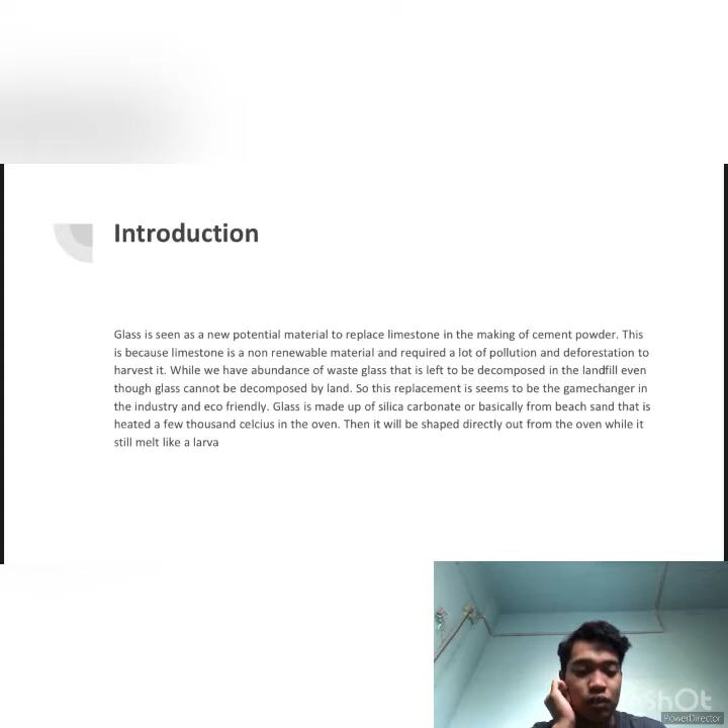Glass is seen as a new potential material to replace limestone in the making of cement powder. This is because limestone is a non-renewable material and requires a lot of pollution and deforestation to harvest it, while we have an abundance of waste glass left to decompose in the landfill, even though glass cannot be decomposed by land. So this replacement seems to be a game changer in the industry, and it is eco-friendly.

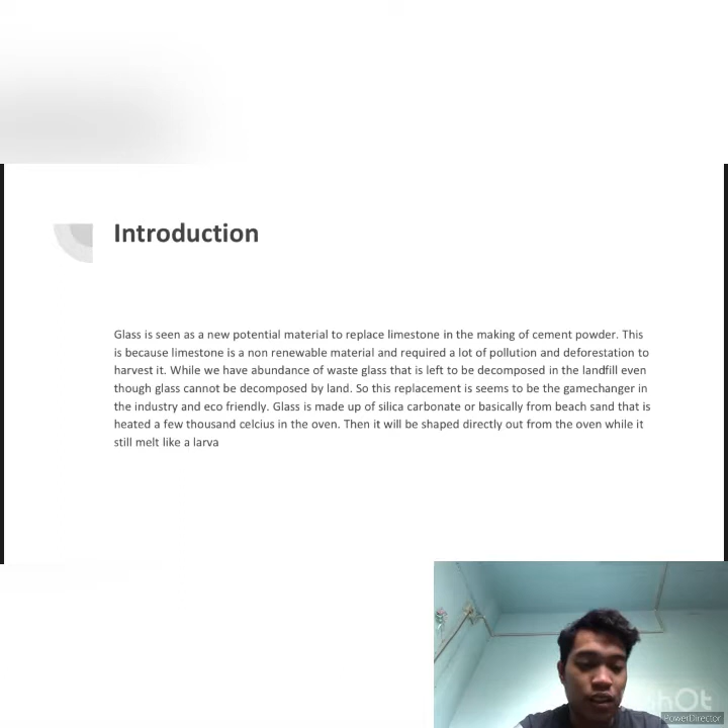Glass is made out of silica carbonate, basically from beach sand that is heated to a few thousand degrees Celsius in the oven. Then it will be shaped directly out from the oven while it's still melted, like lava.

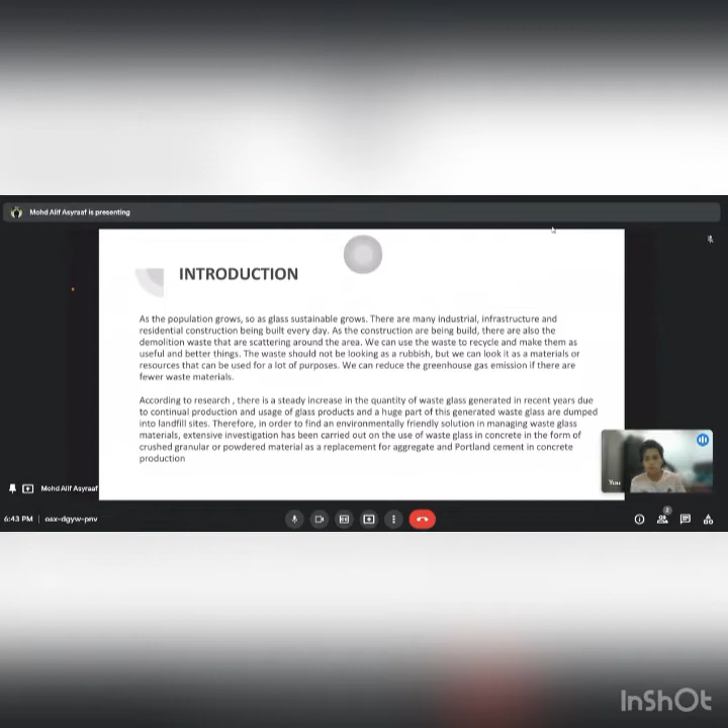extensive investigation has been carried out on waste glass in concrete form, as a crushed granular or powder material, as a replacement for the aggregate and Portland cement in concrete production.

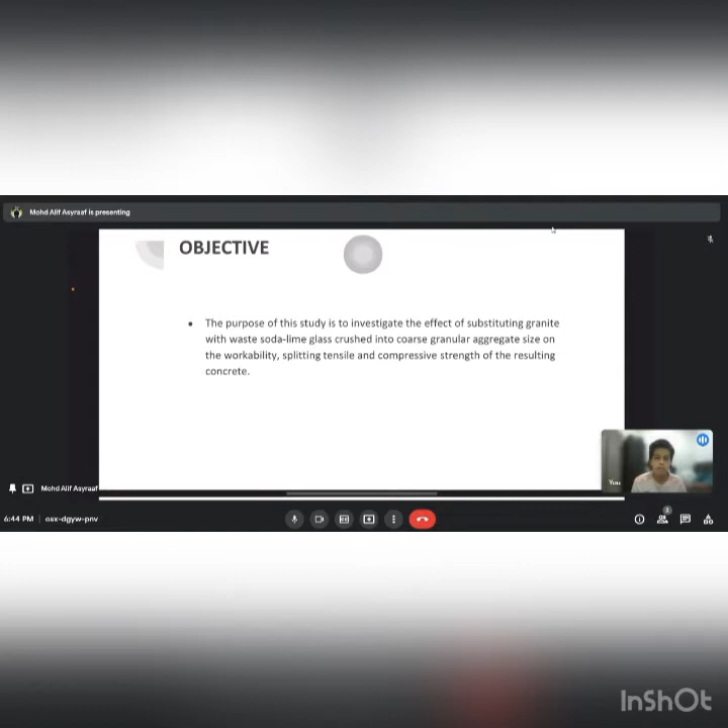So the objective of this journal is to investigate the effect of substituting granite with soda lime glass crushed into a coarse granular aggregate size, on the workability, splitting tensile, and compressive strength of the resulting concrete.

So for the experimental methodology, firstly we use the slump test. As we know, all mix is in proportion 1, 2, and 4, which is cement, sand and granite, also the glass aggregate, and constant water at 0.5.

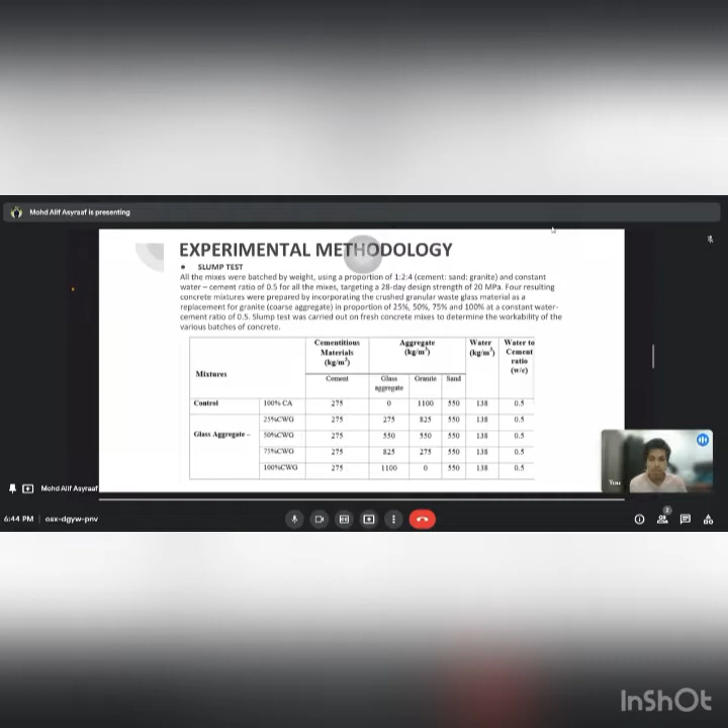And then, as shown in the table below, we can see the 5 tests of the experiment, which is the percentage of cement water and the glass, which is 25%, 50%, 75%, and 100%.

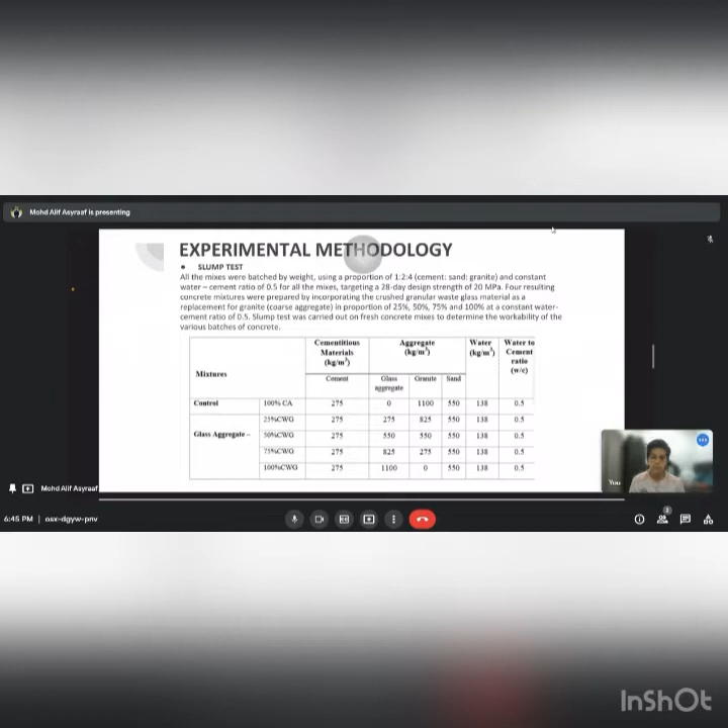So next is the compressive strength test, where the concrete cube was made and immersed in water at room temperature, and tested for compressive and split tensile strength at ages 3, 7, 14, 28, and 90 days, for each percentage of replacement of granite granular with waste glass aggregate material.

The compressive strength of the concrete cube and the split tensile strength of the concrete cylinder were determined in compliance with the provision, using the YES 2000 digital display compression machine.

Lastly, is scanning electron microscopy, SEM. The microstructural examination of the fractured part of the concrete was carried out using the scanning electron microscopy, SEM.

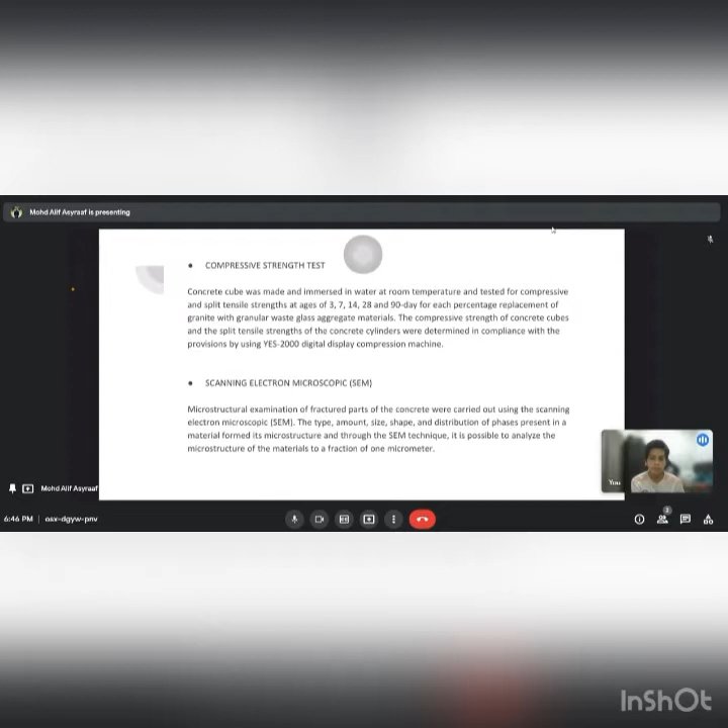It can determine the type, amount, size, shape, and distribution of phases present in the material form in the microstructure, and through the SEM technique, it is possible to analyze the microstructure of the material to a fraction of 1 micrometer.

This reduction in slump may be attributed to the angular geometry of the granular particle of the glass, which reduces the fluidity of the mix as the glass content increases, resulting in less availability of cement paste required for the concrete fluidity. Moreover, for concrete containing glass aggregate to achieve the same workability as conventional concrete, it will require higher water content.

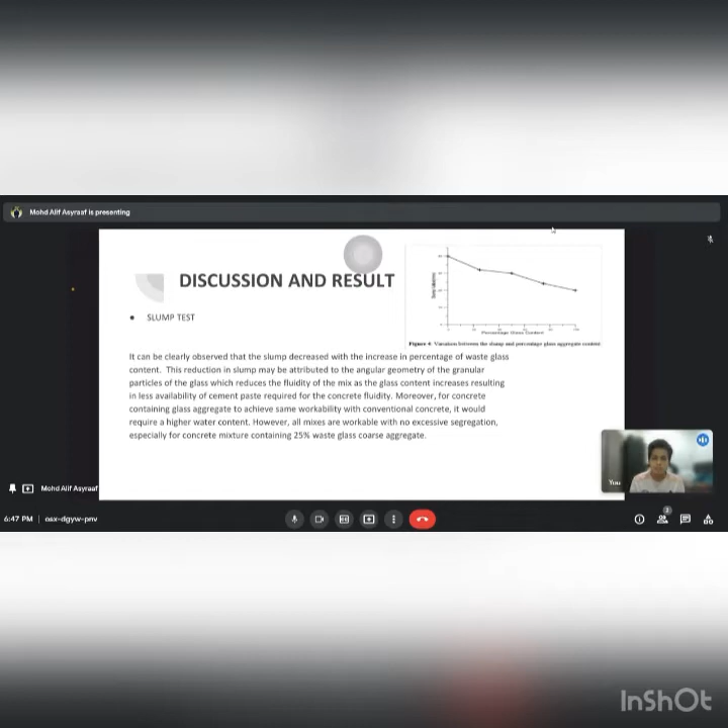However, all mixes are workable with no excessive segregation, especially for the concrete mixture containing 25% glass coarse aggregate. Next is the compressive strength.

From the graph above, it clearly indicates that as the percentage replacement of granite with glass aggregate increases beyond 25% replacement, the compressive strength of the concrete decreases at early curing ages of 3 and 7 days.

At both curing ages of 28 and 90 days, the decrease of the compressive strength of the concrete shows strong correlation. They observed lower compressive strength of the concrete mixture containing 75 and 100 percent granular aggregate, attributed to the weaker bond strength between the sharper edge and smooth surface of the glass particle and the cement paste matrix at the interfacial transition zone.

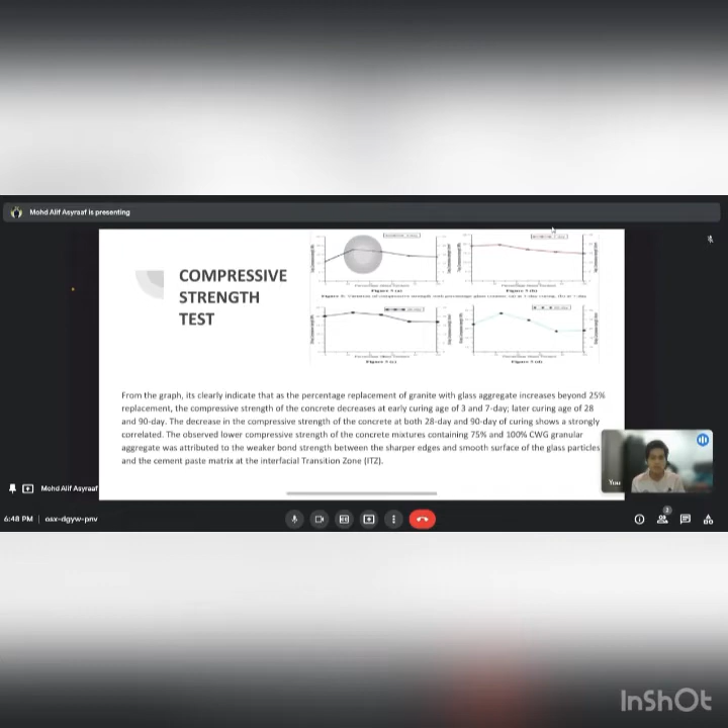Lastly, from scanning electron microscopy, SEM. The microstructural examination by SEM on selected concrete containing glass aggregate was conducted to further assess the bond between the cement paste at the interfacial zone.

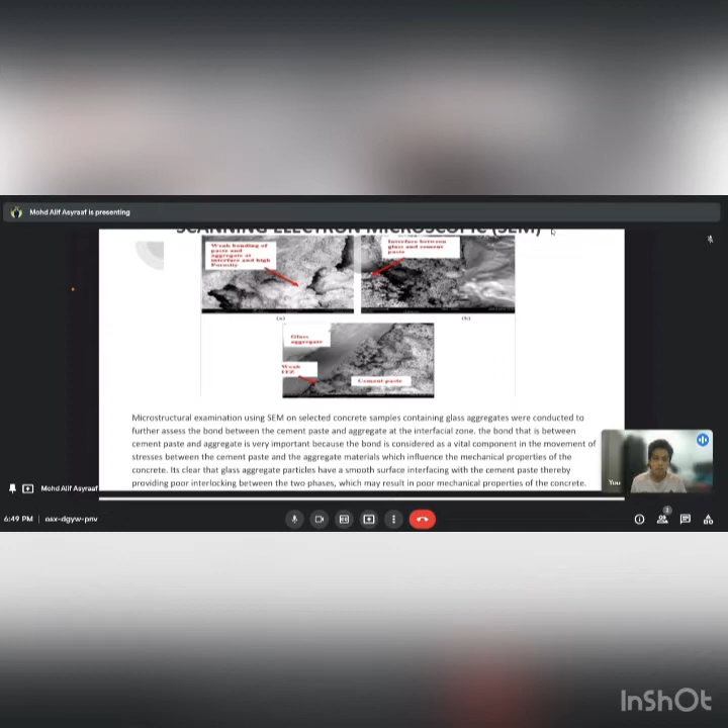Strength and microstructure of eco-concrete produced using waste glass, with partial and complete replacement for sand.

Introduction. The benefit of using waste glass as a substitute for natural aggregate in concrete offers a promising environmental solution to the growing problem of efficient management of glass waste in developing nations.

Glass is an indispensable material to man and one of the oldest man-made materials on Earth. Because of its properties, glass can be formed into many shapes and forms, which include flat glass, bulb glass, container or bottle glass, and cathode ray tube glass.

However, glass has a limited life usage in the form in which it is produced. Moreover, based on chemical composition, glass can be classified into different categories, with the most widely used and readily available glass type being soda-lime glass.

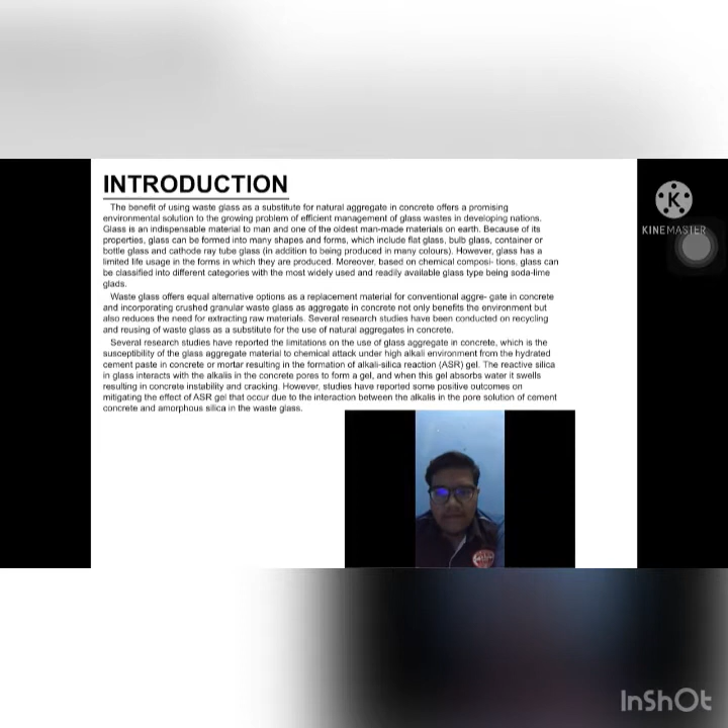Waste glass offers an equal alternative option as a replacement material for conventional aggregate in concrete, and incorporating crushed granular waste glass as aggregate in concrete not only benefits the environment but also reduces the need for extracting raw material.

Several research studies have been conducted on recycling and reusing waste glass as a substitute for natural aggregate in concrete. Several research studies have reported the limitation on the use of glass aggregate in concrete.

The limitation is the susceptibility of the glass aggregate material to chemical attack under a high alkali environment from the hydrated cement paste in concrete or mortar, resulting in the formation of alkali-silica reaction.

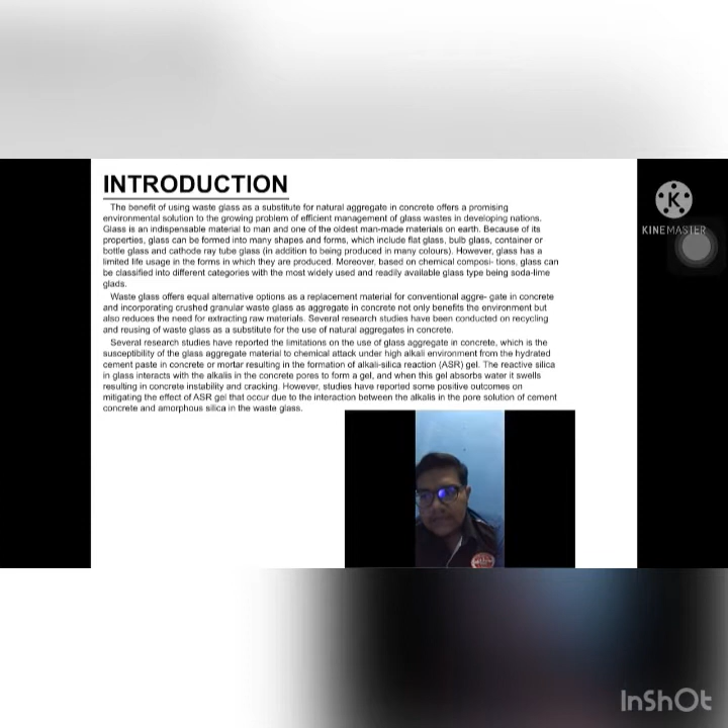The reactive silica in glass interacts with the alkalis in the concrete pore solution to form a gel, and when this gel absorbs water it results in concrete instability and cracking.

However, studies have reported some positive outcomes on mitigating the effect of ASR gel that occurs due to the interaction between the alkali in the pore solution of cement concrete.

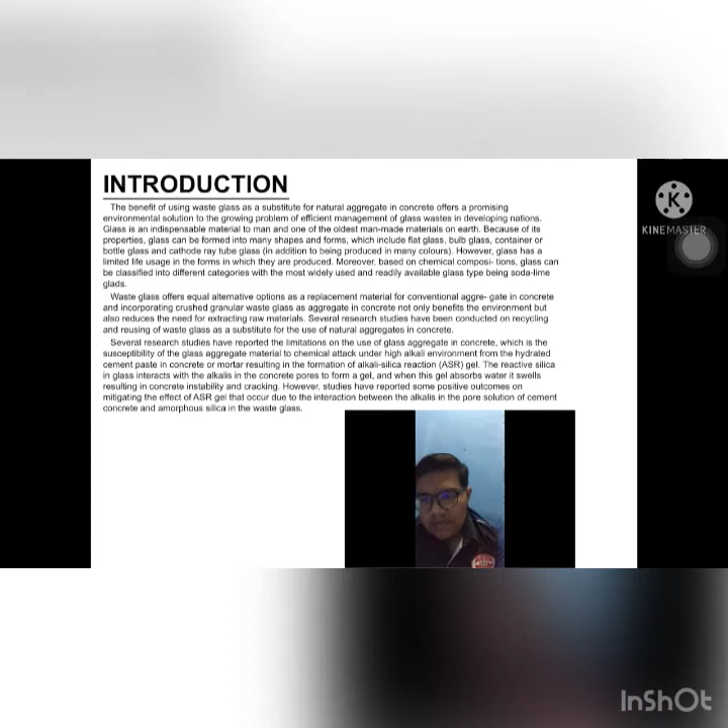Methodology. All concrete material used in this current study were locally sourced. Typical ordinary Portland cement, which complies with ASTM Type 1 cement suitable for general purpose construction, was used.

The chemical composition of the cement was determined according to ASTM C114 using X-ray fluorescence. The chemical composition and physical properties of the cement are shown in Table 1.

The waste glass was collected from different waste disposal sites and glass workshops within the environment of OTA, Nigeria. The collected glass contained majority flat glass and container glass. After collection, the glass was soaked in water.

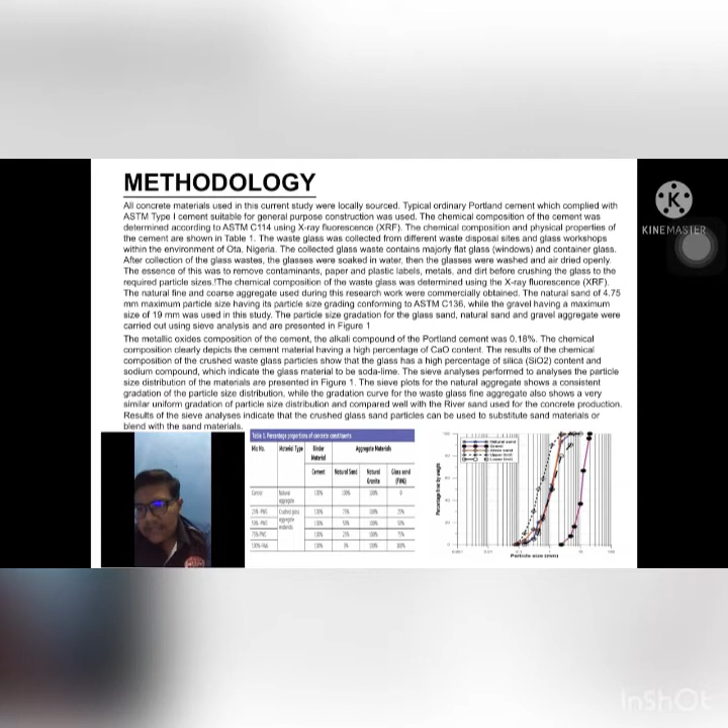Then the glass was washed and air dried openly. The essence of this was to remove contaminants—paper, plastic labels, metal, and dirt—before crushing the glass to the required particle size.

The chemical composition of the waste glass was determined using X-ray fluorescence. The natural fine and coarse aggregate used during this research work were commercially obtained.

The natural sand of 4.75 mm maximum particle size had its particle size grading conforming to ASTM C136, while the gravel having a maximum size of 19 mm was used in this study.

The particle size gradation for the glass sand, natural sand, and gravel aggregate were carried out using sieve analysis and are presented in Figure 1.

The metallic oxide composition of the cement showed the alkali compound of the Portland cement was 0.18%. The chemical composition clearly depicts the cement material having a high percentage of CaO content.

The result of the chemical composition of the crushed waste glass particles shows that the glass has a high percentage of silica content and sodium compounds, which indicates the glass material to be soda-lime glass.

The sieve analysis performed to analyze the particle size distribution of the material are present in figure 1. The sieve plots for the natural aggregate show a consistent gradation of the particle size distribution, while the gradation curve for the waste glass fine aggregate also show a very similar uniform gradation of particle size distribution, and compare well with the river sand used for the concrete production.

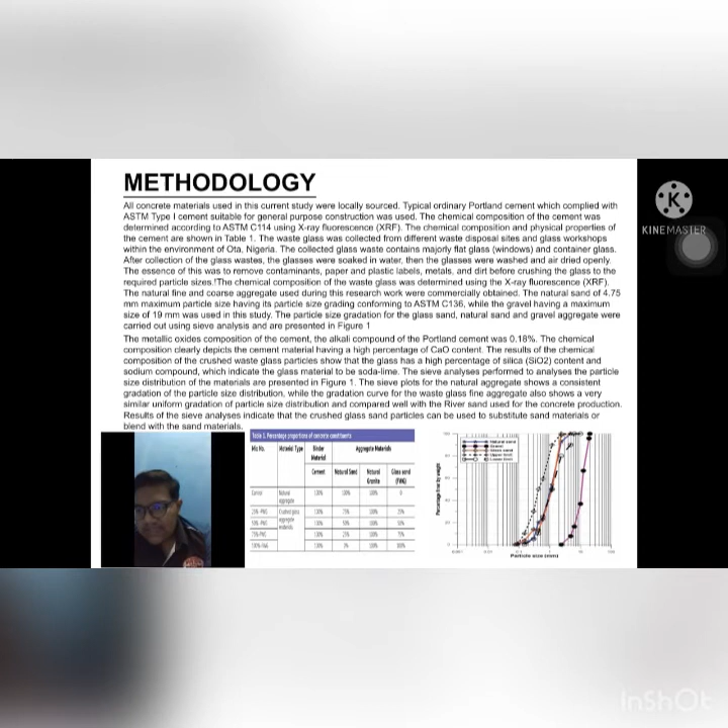Result of the sieve analysis indicate that the crushed glass sand particle can be used to substitute sand material or blend with the sand material.

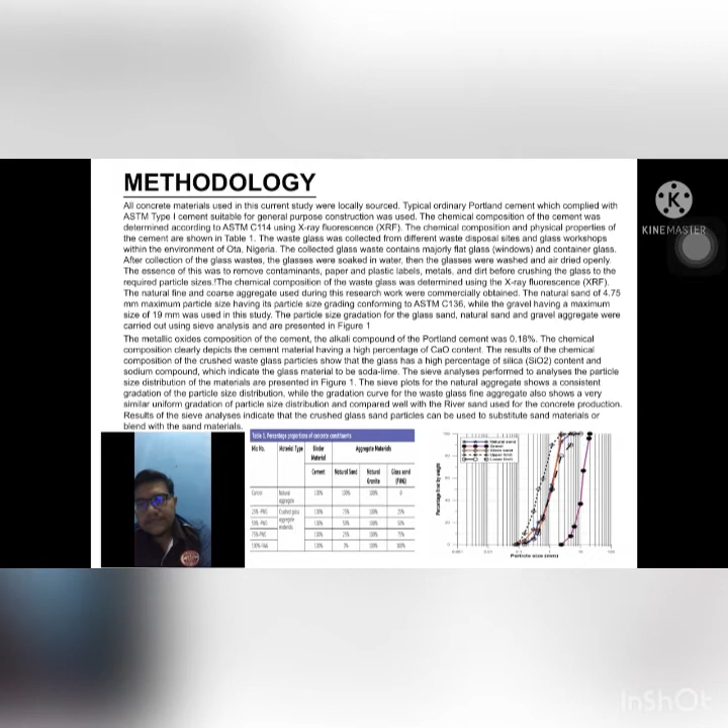Result and discussion. Properties of fresh concrete: workability. The test result for the slump recorded for the control and mix containing fine glass sand at different proportions are shown in picture 1.

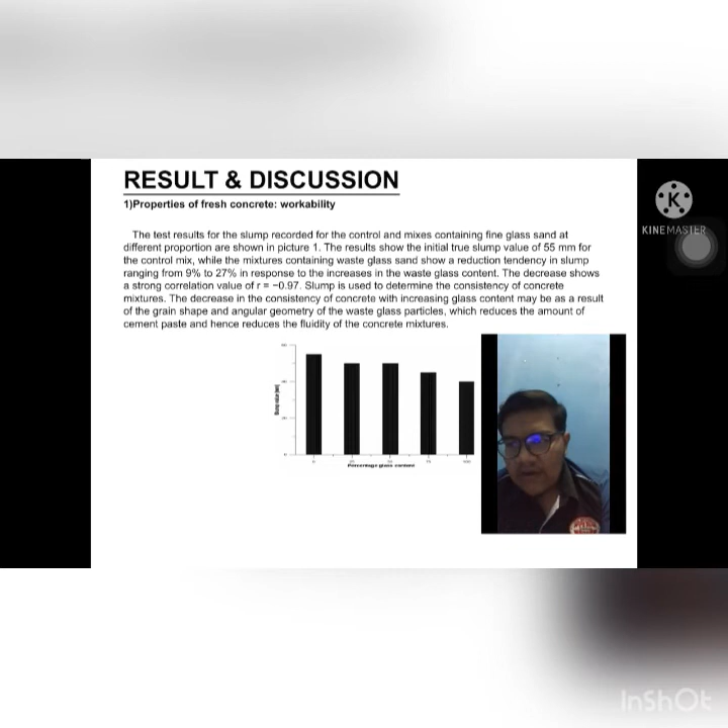The results show the initial true slump value of 55mm for the control mix, while the mixture containing glass sand show a reduction tendency in slump, ranging from 9% to 27% in response to the increase in waste glass content. The decrease show a strong correlation value of R equal to negative 0.97.

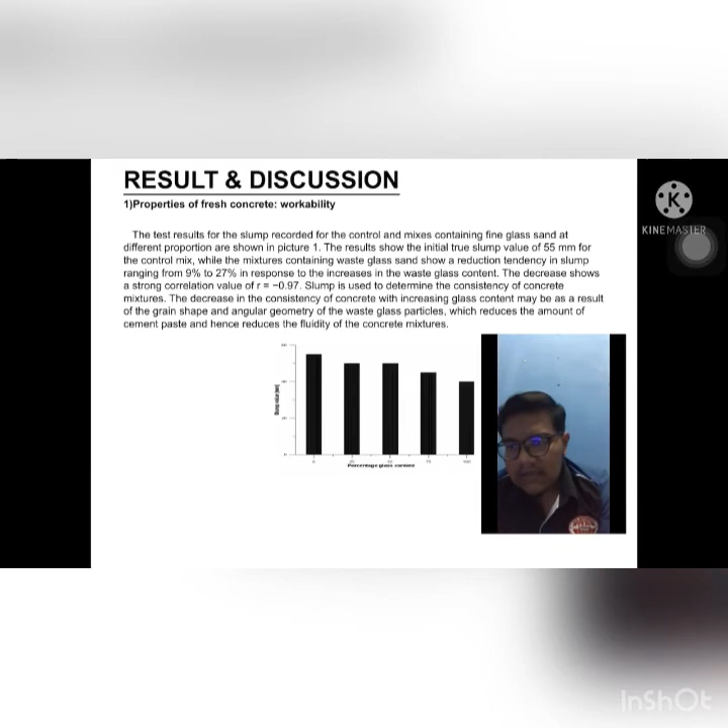Slump is used to determine the consistency of the concrete mixture. The decrease in consistency of concrete with increased glass content may be a result of the grain shape and angular geometry of the waste glass particle, which reduces the amount of cement paste and hence reduces the fluidity of the concrete mixture.

Next, compressive strength. Picture 2 illustrates the compressive strength variation of control concrete and glass sand concrete for curing periods of 3, 7, 28, and 90 days respectively.

The result clearly indicates that the use of glass content shows an increase in compressive strength from the early curing age of 3 days to 90 days.

Moreover, concrete containing 50% glass content also shows comparable strength to the control concrete for all curing ages. The concrete mix containing 25% and 50% glass content as replacement achieves a 28-day compressive strength.

Last, splitting tensile strength. The splitting tensile strength test results are presented in Figure 3 for various curing ages. The recorded splitting tensile strength for the glass sand concrete varied between 2.18 megapascal and 2.78 megapascal at 28 days curing.

Moreover, Picture 3 depicts the split tensile strength result at 90 days of curing to be between 2.8 megapascal and 3.61 megapascal, which is lower than the 4.20 megapascal achieved at 90 days for the control.

The observed test result clearly indicates that the increase in the proportion of glass sand content in the concrete mix leads to a decrease in the split tensile strength of the concrete, which may be attributed to the decrease in adhesive strength of the glass sand concrete as the proportion of glass content increases.

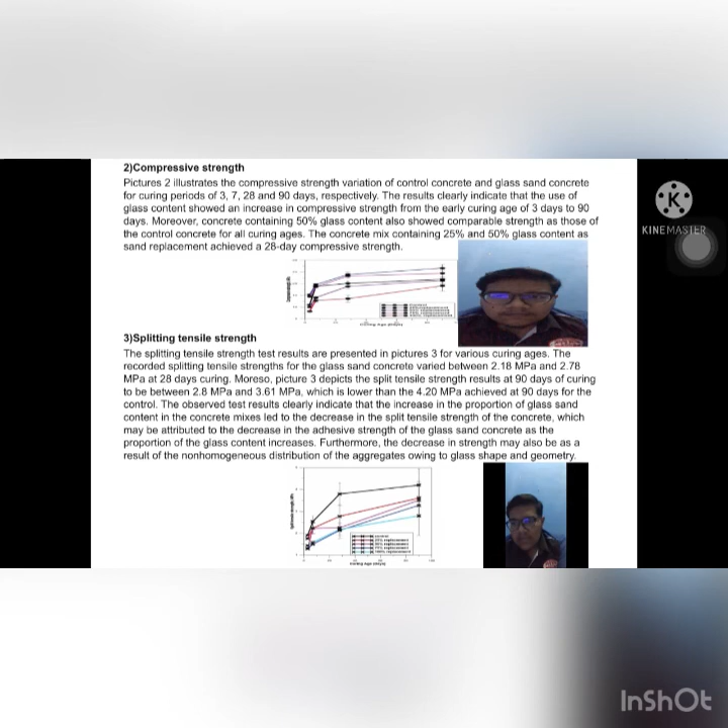Furthermore, the decrease in strength may also be a result of the non-homogeneous distribution of the aggregate owing to glass shape and geometry.

For the recommendation, using glasses such as low-E high performance energy efficient glass can help a green building achieve great balance between all parameters and block a high amount of solar radiation by reflecting away the infrared part of sunlight.

This helps the building remain comfortably cool in summer and cut down on energy bills and air conditioning usage.

Furthermore, the biggest advantage that makes glass a major component in green building is the fact that it is recyclable and also does not have a huge impact on the environment.

Glass can play a role in accomplishing greater indoor environmental quality and, when used carefully, can also improve energy efficiency along with tangible benefits. Glass can also provide enhanced air quality, excellent daylighting, and general health and well-being of occupants.

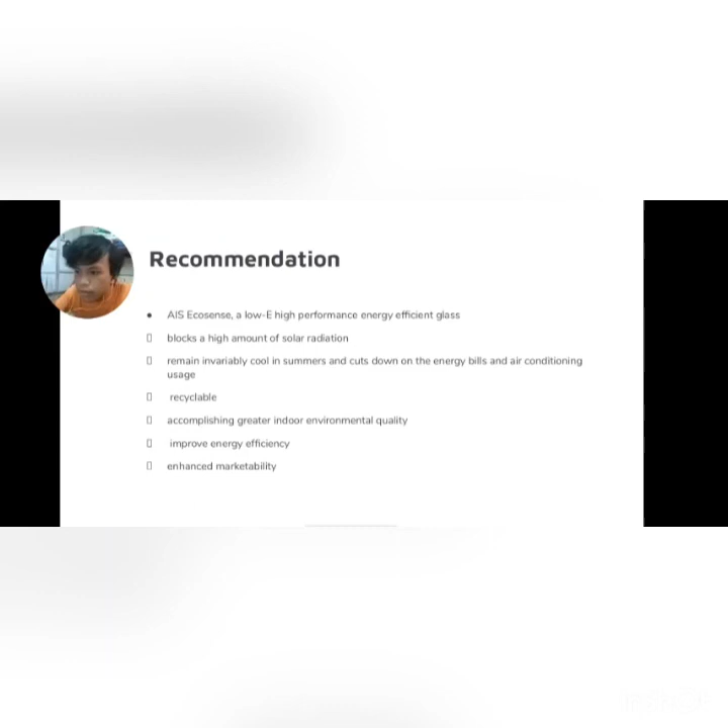From a global point of view, conservation of scarce natural resources is also a huge advantage, where its widespread acceptance and enhanced marketability for the project make it a viable option for the industry too.

And for the conclusion: glass has potential to replace limestone in the making of cement powder. This is because limestone is a non-renewable material and requires a lot of pollution and deforestation to harvest it.

While we have an abundance of waste glass that is left to decompose in the landfill, even though glass cannot be decomposed by land.

So we can recycle all the waste glass that is just piling up in the landfill and turn it into useful material, and at the same time we may slowly decrease the usage of limestone, as it requires huge land mass to be cleared just for mining it, while avoiding elements that cannot be disposed and decomposed by earth at the landfill.